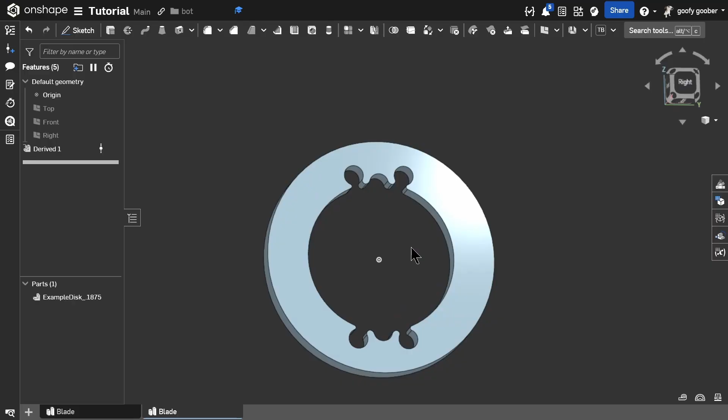Alright, here's how to design your very own S blade in Onshape. So we'll start off with the Repeat Robotics ant weight hub motor keying design. This profile in the middle is what we'll use to start off. And because it's on the right plane, I'm going to start sketch on the right plane.

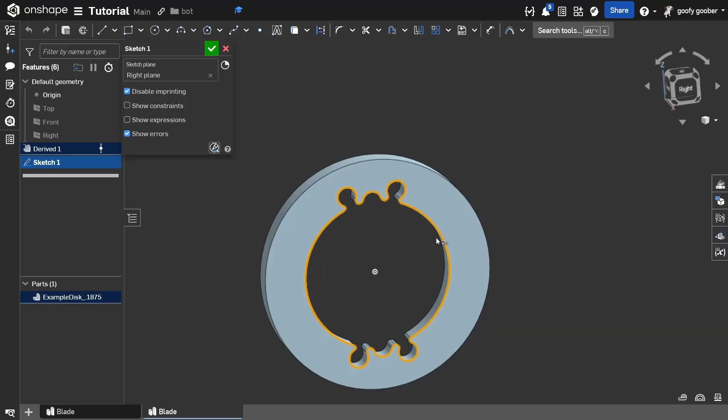So starting off, we're going to need to project this inner profile into our sketch. So I'm going to select one of the edges and click tangent connected edges so it selects the whole thing. Then I'll click use, and if we hide the part now, you can see we have the entire profile in our sketch.

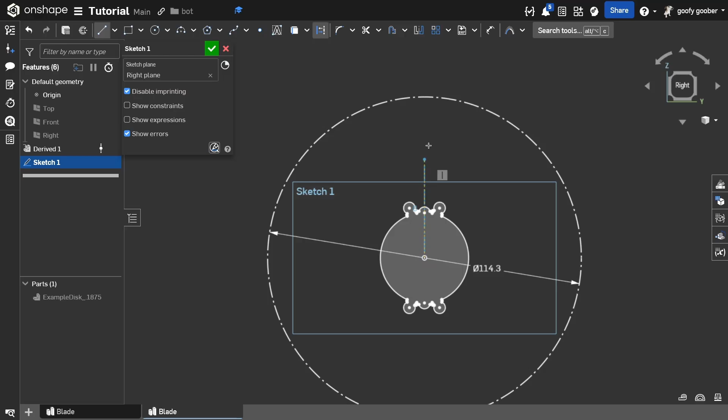So first thing I'll do to make the actual blade is make a construction circle. That's the diameter of our blade. Let's say it's 4.5 inches. I have it in millimeters, but if you type in inches, it'll auto convert. So first thing I'll do here is make a vertical construction line.

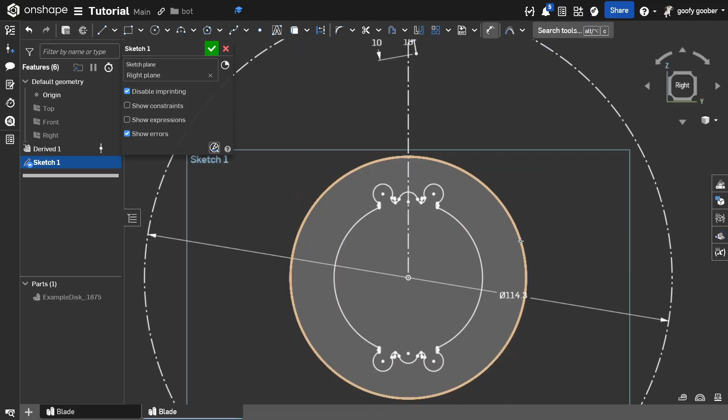It's going to be for a tooth side weapon, and I'll make leading edge here have a rake angle of, I don't know, 10 degrees. That looks good, and a length of, I don't know, 10 millimeters. We can all change this later. And then you're going to want a circle on the outside. You'll see what we use this for soon. Let's make it 52 millimeters, sure.

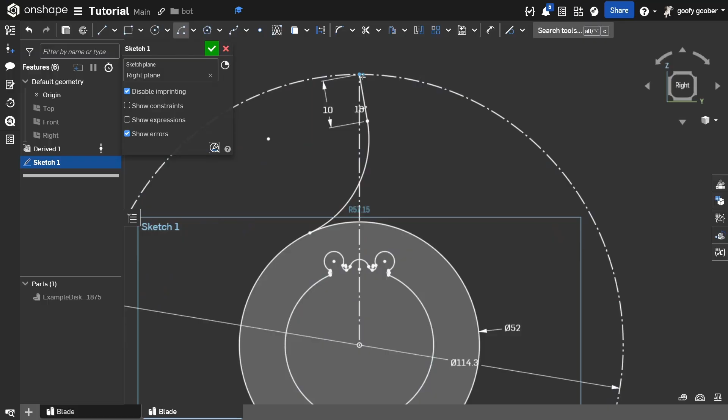Then we're going to click arc, make an arc connecting the line and the circle, make sure it's tangent to this line, and make it tangent to the circle too, with T. Next thing we're going to want to do is click center point arc, make a center point arc connecting the line with the outer edge. This is going to be the outer edge of our tooth.

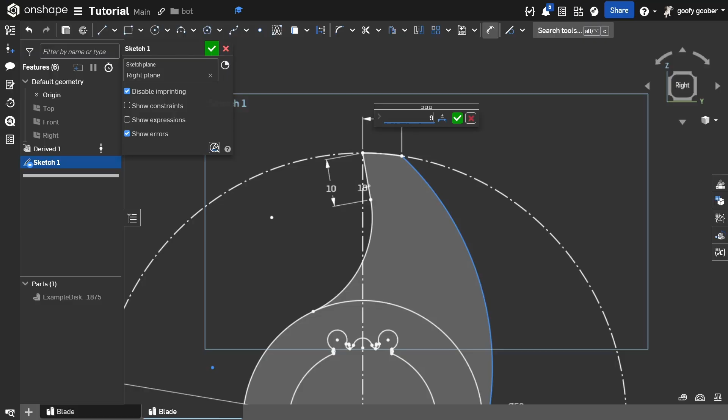And then I'm going to hit A again to make an arc, and make one connecting the tooth and the circle, and I'm going to make this tangent too. So it's not very constrained right now, so I'll dimension it to be, I don't know, 9 millimeters, and I'll dimension the arc to be, let's say 92 millimeters. That looks about right. Next thing we're going to want to do is make the counterweight blade profile.

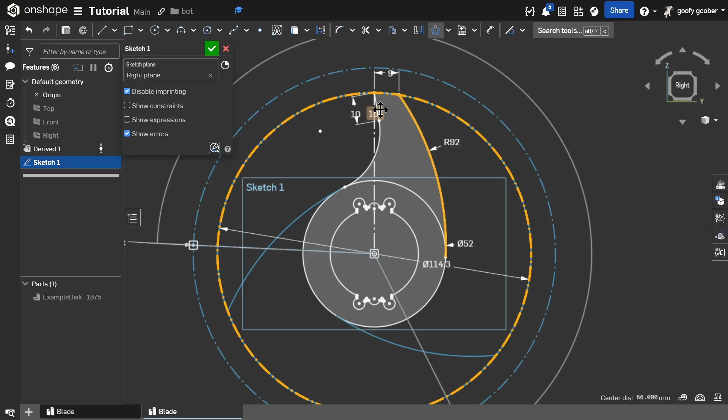You can make a symmetrical blade if you want. If you wanted to do that, you would go here, circular pattern, select this whole thing, and it would make you a circular patterned symmetrical blade. That's a tri-blade. Yeah, so something like this, but I'll show you how to make an asymmetric blade, because a lot of people get stumped on that when they're starting out.

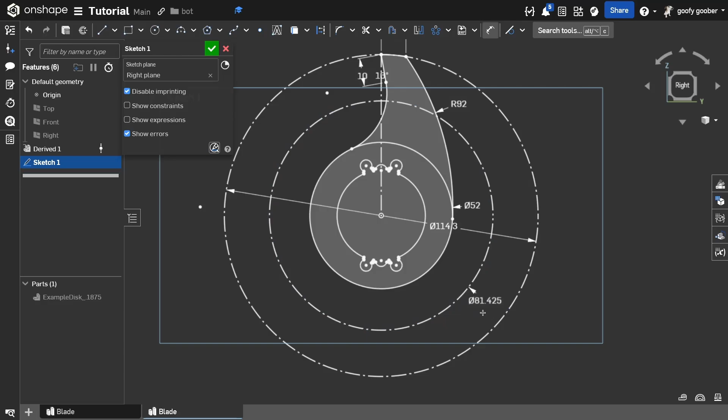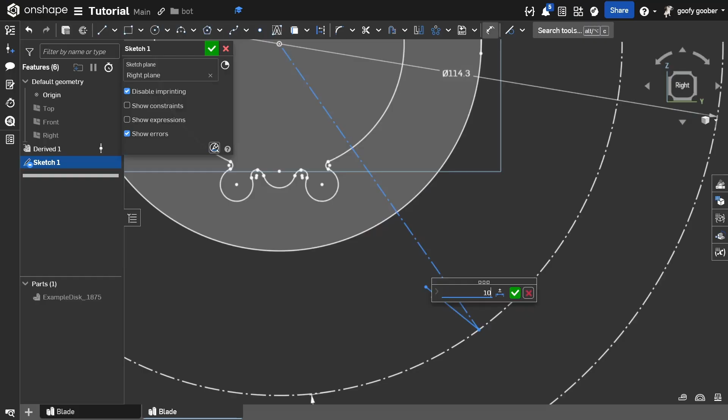So to make the other side, we're going to recreate the same thing. We'll make a construction circle and, actually, why don't we dimension it based off the big circle? Let's say it's got a dimension of 15 degrees. Nah, maybe 14 or 13. Yeah. And then we'll make another construction line and basically copy what we did by making a line, giving it a rake angle, 10 degrees sounds good, giving it a length, 9, and giving it an arc.

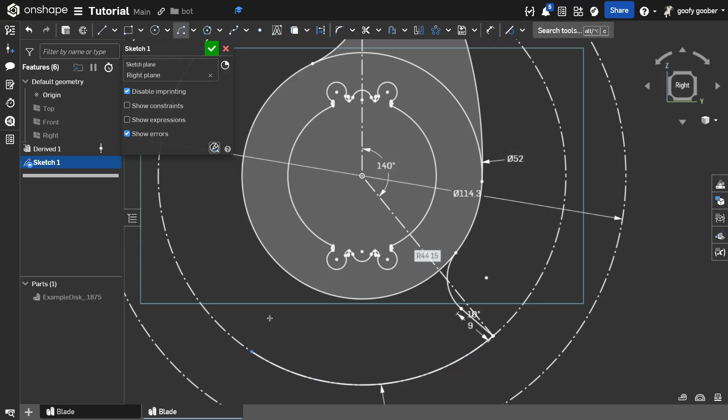Connects it to the circle. So we'll make that tangent, and we'll make these tangent too. And now we need to constrain this, so I'll constrain it to the original line we made, and I don't know, 140 degrees seems good. We'll change this later. Then we'll do the same thing we did and use center point arc connected to the counterweight side. That seems good. And then have an arc.

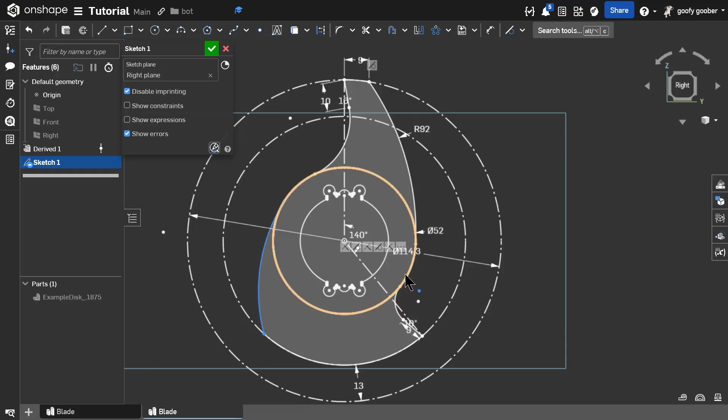And this should be tangent to the circle. So it's obviously too big. Looks kind of strange. I would say you can play with it until it looks good. Something like this where you see the arc kind of mimics the entire thing, so it looks like one smooth profile. Looks good. And I'll dimension this 59,

and we'll need to constrain it one last time with one of these construction lines, and I'll base that off of the vertical construction line too. 138. That seems good. So you can see we have a pretty decent S-blade profile.

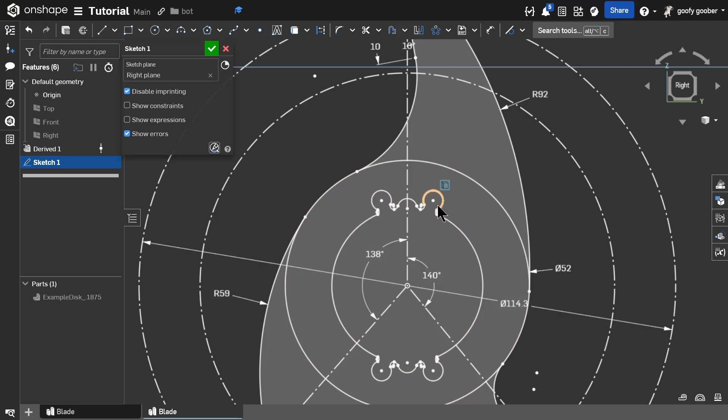I will say the one thing to keep in mind is that usually you want your keying profile, like the screws and bumps and stuff you see here, to line up with your tooth and counterweight. But right now it's completely vertical because of how we made the sketch. So what I'm going to do is take my original construction line that's lined up with the tooth, delete the vertical constraint, and rotate the entire thing until it looks like this.

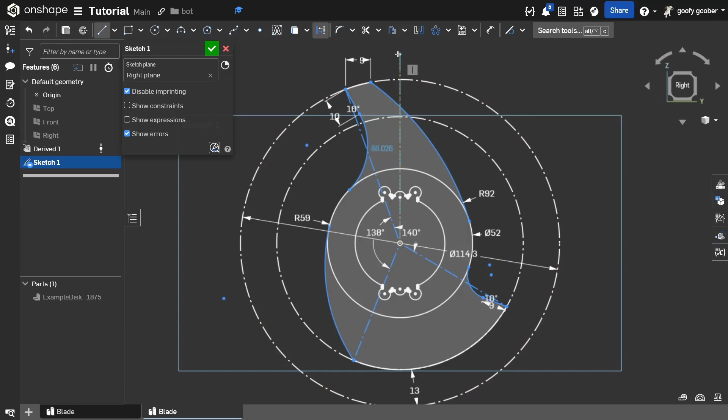And what this does is that it lines the hub motor mounting with the blade a lot better. And to constrain it, I'll make another vertical line. This time it's actually going to be vertical, and constrain the top line. 20 degrees sounds good.

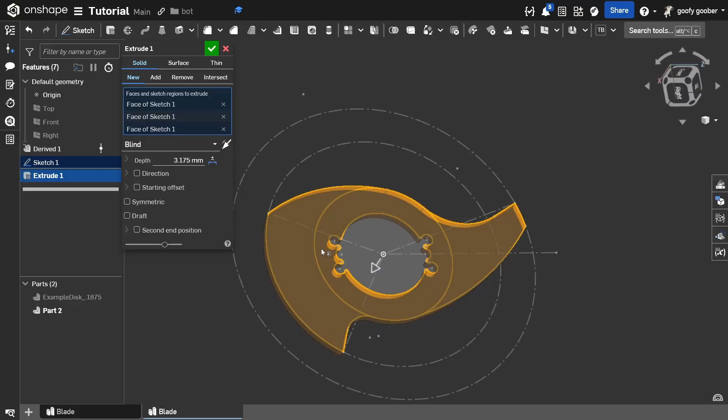So now what we can do is finally extrude the actual blade out. Let's say it's an ant weight, make it 1/8 inch, or 3.175 millimeters. And right off the bat we see we need to fillet this. You can do filleting in the sketch, but I wouldn't recommend that for beginners. And for a fillet size, I would say 7 millimeters is good.

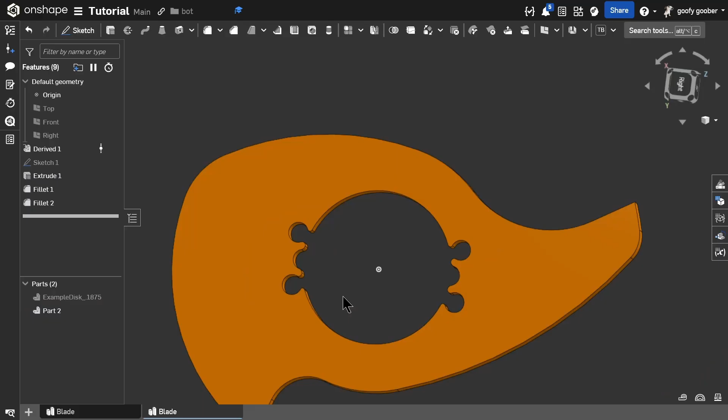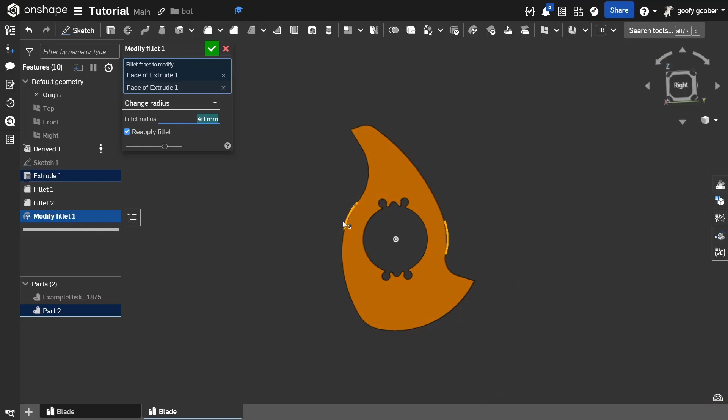Honestly, for the counterweight side, I might just make it a bigger fillet, so a separate one of 15, just so it looks smoother. And another thing I would want to do at this point is, if you look at it from the right profile, you can see how near the middle seems a lot more uneven. So if I modify fillet these two edges and actually make the arcs have a greater radius, it thins it down more. So before, you can see the curvature is almost poking out there, and afterwards it smooths it out to make it one even profile.

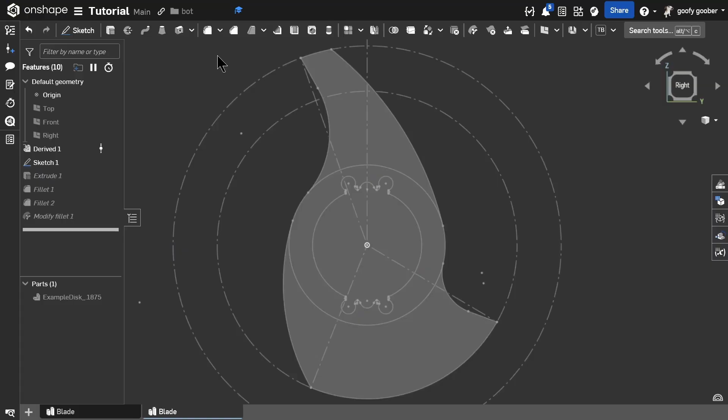So I'm gonna go back and change it to make it a little thinner. I don't think it needs to be this thick. And this will also make it look smoother. Oh, it looks pretty thin here. So we'll go back and change it. That's the nice thing about CAD, is that you can always change your designs. And I'm going to decrease that angle we did.

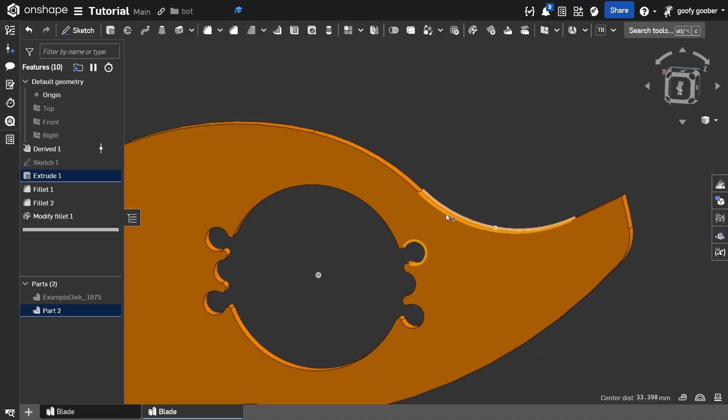That looks pretty good. So at this point, we're gonna wanna just make sure that it won't break horribly. In Onshape, you can use the measure tool by clicking two things. And in this case, we want to find the minimum distance between these two features. So the minimum distance is 6.767 millimeters. So that seems fine.

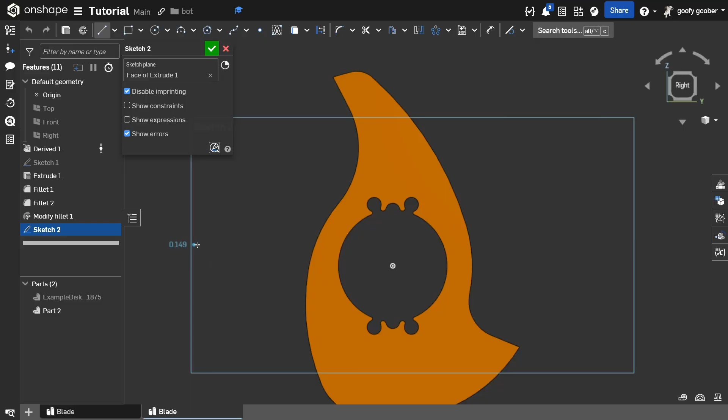The next part is pocketing. Now in Onshape, there's two ways you can pocket. One is the easy way, but you don't get much freedom over pocketing. Two is the manual way. I'll show you how to do the easy way. So first, you're gonna make a line through this. It can be pretty rough, you don't have to constrain it. And in the sketch where you do that, make sure you unclick disable imprinting.

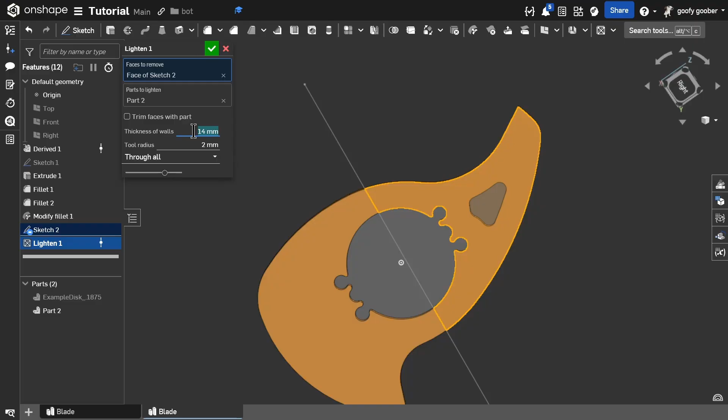Then you're gonna want the feature script, which is like a plugin, called Lighten. I think it's an official feature script. If you don't know how to get this, then look it up. So we're gonna click Lighten, and we're gonna click one of them first. And it should be through all. And I think tool radius of 2 should work, and wall thickness of maybe 12. And this distance isn't actually 12, it's half of whatever you set the wall thickness to. So this is 6 millimeter wall thickness.

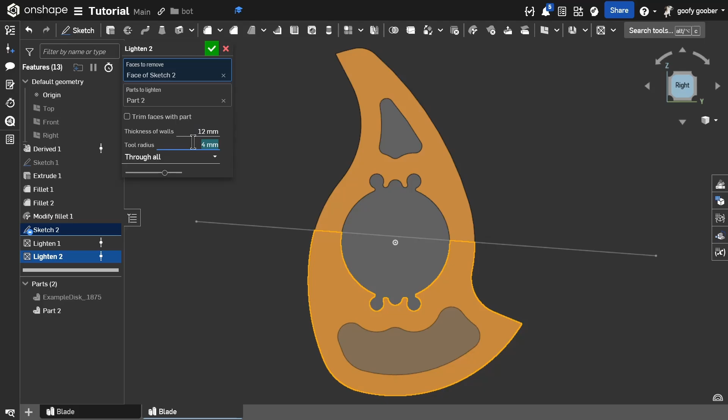So we'll do the same thing for the counterweight side. I'm going to change it to maybe a higher tool radius, because it's a little funny if you have it too small there. It's kind of obvious that you used a feature script to do this. I think 4 looks about right, and we'll call that done. We'll hide the line, and here is a pretty decent blade, I would say.

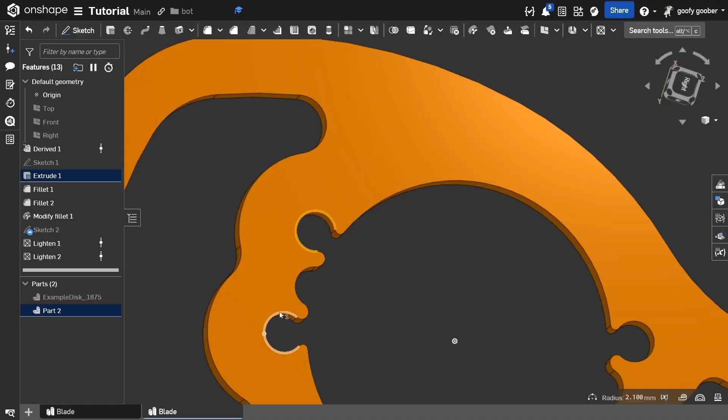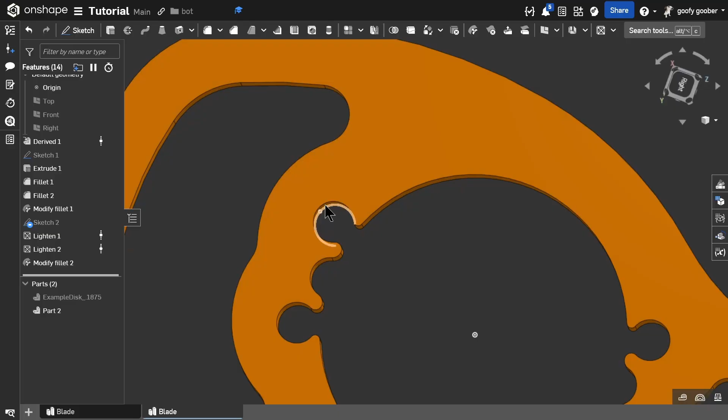One thing that looks a little unnatural is this bump artifact; it's actually from these two screw holes in the profile. So what the feature script did is it curved this out and offset it, and it looks a little funny. So what I'm going to do is hit modify fillet on these two and increase the radius so it's less noticeable. And we don't need too much meat here, this distance, so it really doesn't matter too much. Now we have a pocketed AR500, presumably 3mm, 4.5-inch ant weight size repeat hub motor S blade.

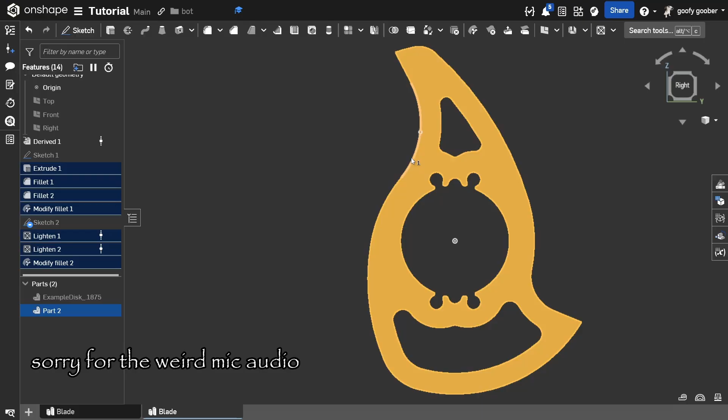And last thing we need to do, of course, is balance it. So we'll need to assign a material: right click on it, assign material, Onshape materials library. I just do 400 series stainless steel, works well enough for AR. And if we click this button here, we zoom in on the origin. We can see the center of mass is not quite at the origin, it's pretty close. So here you can see it's 0.6 millimeters off in the Y direction and 0.05 in the Z direction.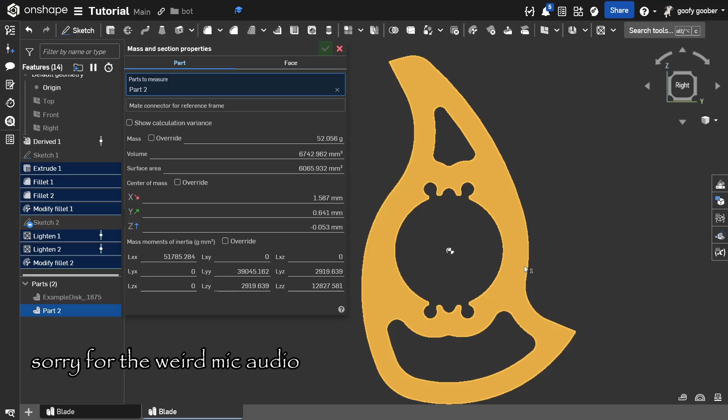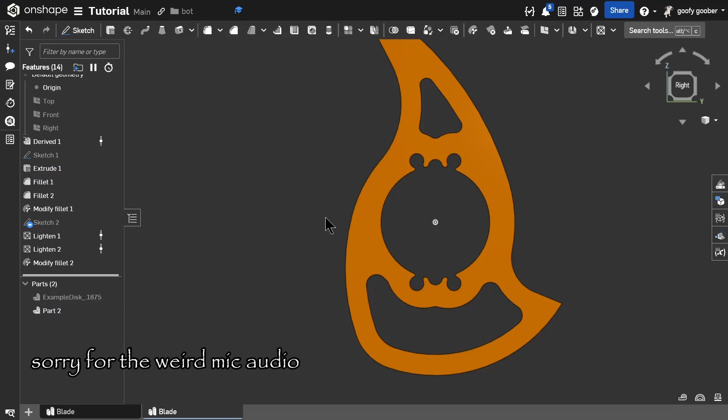So I'm going to want to increase material over here or decrease the material on this side to get it close enough. I like it at around 0.05 millimeters away from the origin or less. So to balance it, I'm going to probably move these. And a lot of CAD is just messing around and seeing what works. But for now, this is a good stopping place. If you want a quick, easy blade design, then you can just follow this.